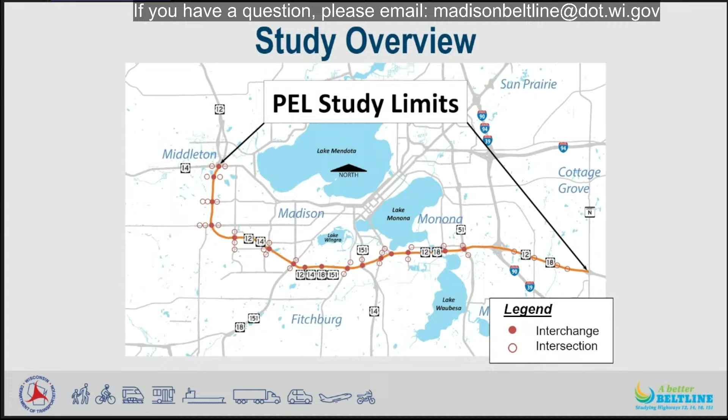The study limits begin at US 14 or University Avenue in the city of Middleton and extend about 20 miles south and east to the County N interchange in the town of Cottage Grove. The Beltline PEL study corridor carries up to 143,000 vehicles per day and includes 18 interchanges. The PEL study process sets up collaboration between federal, state, and environmental agencies, as well as project stakeholders. This early coordination helps eliminate unreasonable alternatives, accelerates environmental review, and may identify any concerns.

The PEL study results can flow directly into future National Environmental Policy Act, or NEPA, studies. A NEPA study analyzes the environmental impacts of projects that use federal funding. During the NEPA process, the potential long-term improvements identified in the PEL will be evaluated in more detail. Design and construction of a project cannot occur until the NEPA process is complete. A PEL study initiated prior to NEPA analysis can help to streamline overall project delivery.

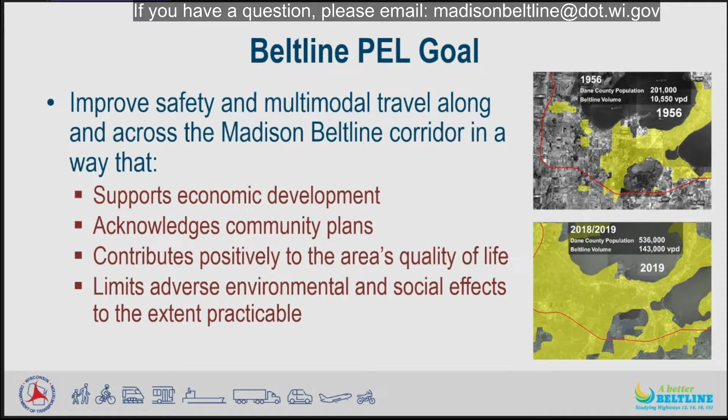The goal of the Beltline PEL study was developed early in the process through collaboration with agencies, municipalities, and other stakeholders. The Beltline PEL seeks to improve safety and multimodal travel along and across the Beltline corridor in a way that supports economic development, acknowledges community plans, contributes positively to the area's quality of life, and limits adverse environmental and social effects. With input from the agencies, local municipalities, and stakeholders, 12 Beltline PEL objectives were also developed. These objectives focus on improving safety, mobility, and accessibility for all modes of travel on, across, or near the Beltline.

The first steps of the study involved outreach and engagement. Using the feedback received, numerous improvement concepts or components were developed throughout the corridor for multiple transportation modes, including vehicles, pedestrians, bicycles, and transit. The components were then prioritized and combined into a range of potential long-term solutions called strategy packages. With input from various agencies and stakeholders, a draft preferred strategy package was identified. In addition, options for how the corridor could be separated into different sections for future NEPA studies were developed, along with general timeframes for when those studies should begin.

The Wisconsin DOT identified a preferred strategy package containing the improvement components the agency proposes to carry forward for more detailed analysis in future NEPA studies. The work completed during the Beltline PEL study is documented in the draft Beltline PEL summary report. The next few slides provide more detail on the strategy package development process.

The section of the Beltline east of the interstate was not included in the development of the strategy packages. Several corridor needs for this section were addressed as part of the US 12/18 and County AB interchange project, and a US 12 freeway conversion study identified potential spot improvements that could be made farther east if needed.

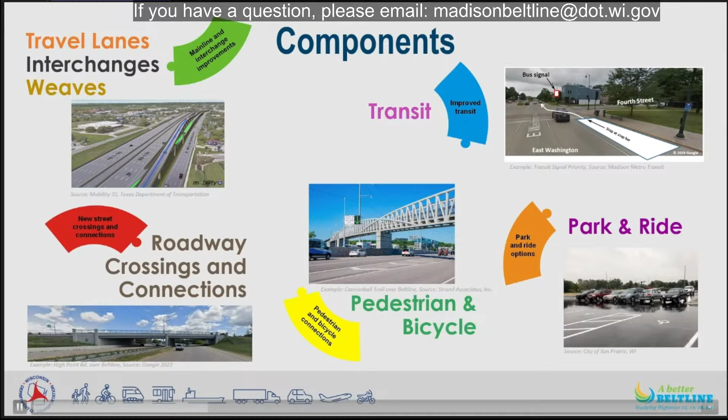The components were then prioritized to determine which combination would fit into the multiple strategy packages, representing a range of long-term options for the Beltline corridor. The mainline and interchange components were prioritized differently than the other component categories. The number of travel lanes added to the Beltline mainline varied with the specific strategy package. A higher mobility strategy package added travel lanes to the Beltline, while lower mobility packages did not.

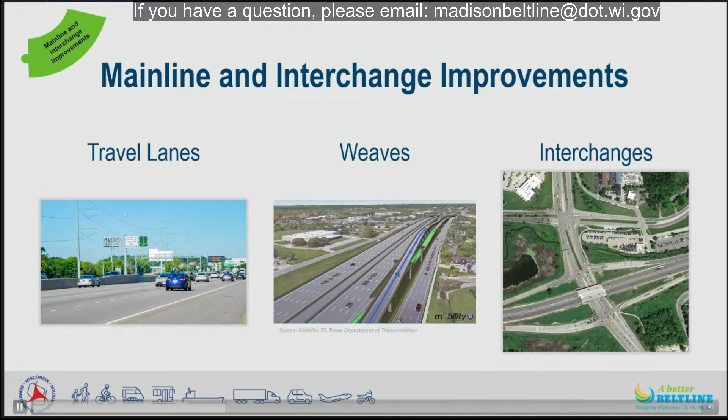For the weaving and interchange improvements, the locations with the worst traffic operations were typically included in more of the strategy packages, and the locations that were not as bad were included in fewer. The remaining components of roadway crossing and connections, bicycle and pedestrian connections, park and ride, and transit categories were prioritized based on meeting the Beltline PEL study objectives, feedback received during outreach efforts, potential environmental and real estate impacts, and accessibility improvements to nearby jobs or destinations.

WisDOT received feedback on the transit components before the Madison Metro Network redesign took effect in June 2023. Transit components were then reprioritized based on those changes. Several strategy packages were developed that combined individual components to meet the Beltline PEL study objectives throughout the corridor.

They included different levels of improvement that range from a strategy package that keeps the Beltline as it is today with only essential improvements and maintenance, labeled SP1 or the Preserve and Maintain package, to a strategy package that allows the Beltline to operate as well as possible while offering the highest level of mobility and accessibility to all modes of travel, labeled SP4. After gathering feedback on the strategy packages and completing additional outreach and analysis, a draft preferred strategy package was identified for the corridor and presented at the last public meetings in 2024.

2 main factors guided the identification of the draft preferred strategy package. The first was the stakeholder feedback received during previous outreach efforts, including several main themes. Respondents want a focus on multimodal components. Adding additional mainline or general purpose lanes to the Beltline was generally not favored throughout the corridor, particularly east of Verona Road where the flex lane is. However, an extension of the flex lane west of Verona Road was generally viewed as acceptable. And in general, people agreed with how the components were prioritized and placed into the strategy packages.

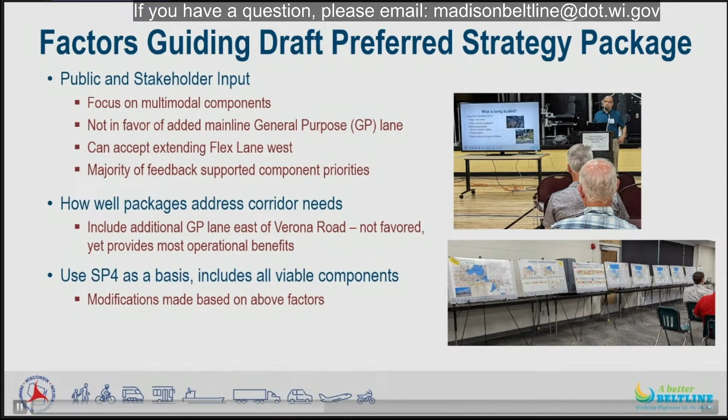Since the last public involvement meetings, modifications were made to the draft preferred strategy package, and the preferred strategy package has been identified. The preferred strategy package is not what's proposed for future construction. It includes the improvement components that the Wisconsin DOT feels should be carried forward and used to develop the range of alternatives that will be evaluated in more detail during future NEPA studies. Some components may change or be eliminated from future consideration as the alternatives, impacts, and costs are developed in more detail and additional feedback is received.

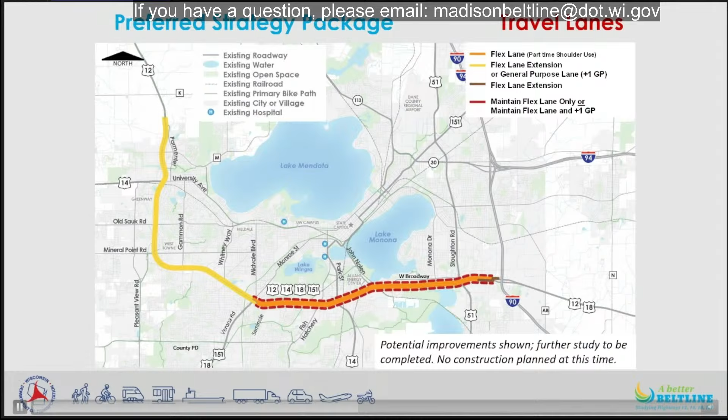Let's review the preferred strategy package. For the mainline components, the section of the Beltline west of Verona Road, shown by the yellow line, includes 2 possible options, either extending the existing flex lane or adding 1 general purpose lane in each direction. The mainline components are shown extending north of the northern study limit to Parmenter Street.

This is because the close interchange spacing, horizontal curves, and the vertical profile of the Beltline in that area make it difficult to drop an additional lane until the Parmenter Street interchange. The section of the Beltline between Verona Road and the interstate also includes two possible options: either keeping the same number of mainline lanes and the existing flex lane, or potentially adding one general purpose lane in each direction while still keeping the existing flex lane, shown by the dashed red lines.

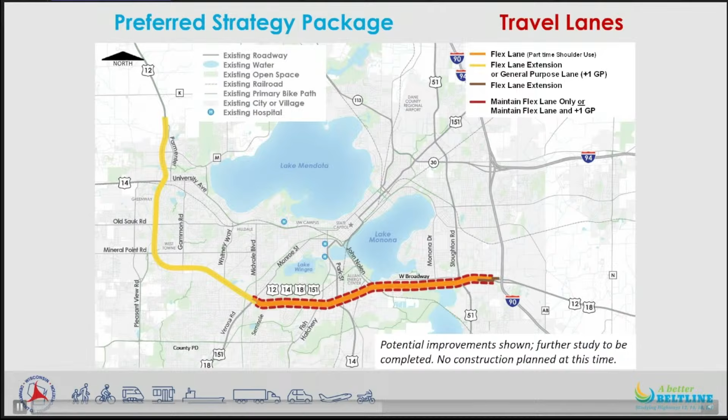For the section of the Beltline between Stoughton Road and the interstate, the existing flex lane would be extended to the interstate, shown by the brown lines. The preferred strategy package includes weaving improvements at several locations shown by yellow circles on the map. Weaving areas are in places where traffic entering the Beltline mixes with traffic exiting at the next off-ramp. These areas often have safety concerns and are where freeway operations frequently break down.

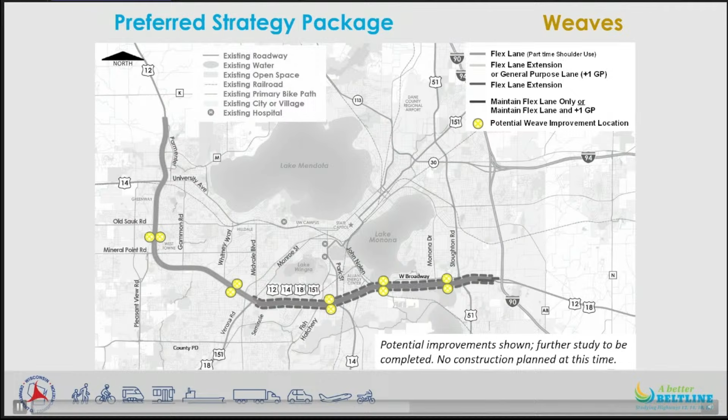Locations include both mainline directions between Old Sauk Road and Mineral Point Road, between Whitney Way and Verona Road, between Fish Hatchery Road and Park Street, between John Nolen Drive and West Broadway, and between Monona Drive and Stoughton Road. There are no changes to the number or location of the weaves included in the Preferred Strategy Package versus the draft Preferred Strategy Package. The Preferred Strategy Package proposes improvements at each interchange.

Most locations are anticipated to be conventional improvements, such as adding turn lanes or through lanes at the ramp intersections. These are the darker blue circles on the map. Locations where more substantial changes are being considered are the light blue circles. These locations include Gammon Road, Whitney Way, Verona Road, Stoughton Road, and the Beltline interchange with I-39/90. The Stoughton Road interchange is currently being evaluated as part of a separate Wisconsin DOT study.

Two modifications have been made to the interchange components identified in the draft Preferred Strategy Package. The locations of these interchanges are highlighted by yellow boxes. The first is the addition of proposed improvements at the I-39/90 interchange at the Beltline. After further analysis, it was determined that a third ramp lane should be evaluated going from the eastbound Beltline to northbound I-39, as well as from southbound I-39 to the westbound Beltline.

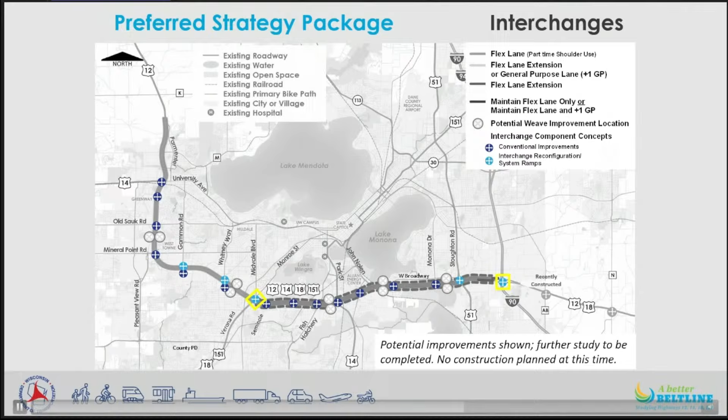The second is the removal of the conventional interchange improvements at the US 18/151 Verona Road interchange. Further analysis determined that the relatively minor improvements included in the conventional option would not address the operational issues at the interchange. Therefore, this improvement component was eliminated, leaving only the interchange reconfiguration system ramps option.

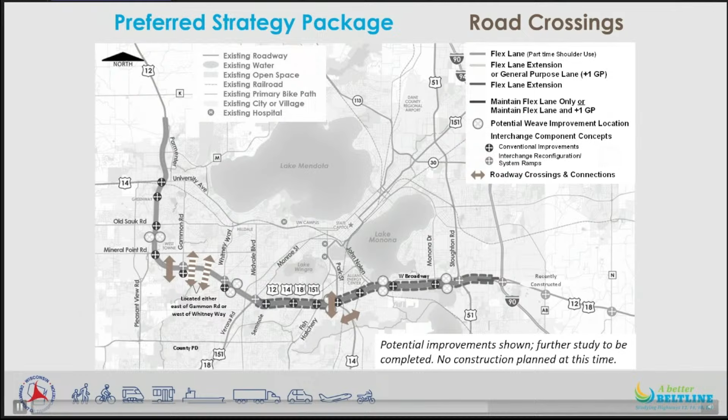Potential new roadway crossings included in the Preferred Strategy Package would accommodate vehicles, bicycles, and pedestrians. Locations are shown by the brown arrows on the map. West of Gammon Road, a crossing either east of Gammon Road or west of Whitney Way, the dashed arrows, west of Park Street, and a crossing of US 14 south of the Beltline. There were no changes to the number or location of roadway crossings and connections components. However, the City of Madison is currently conducting a study of the new crossing location west of Park Street at Perry Street.

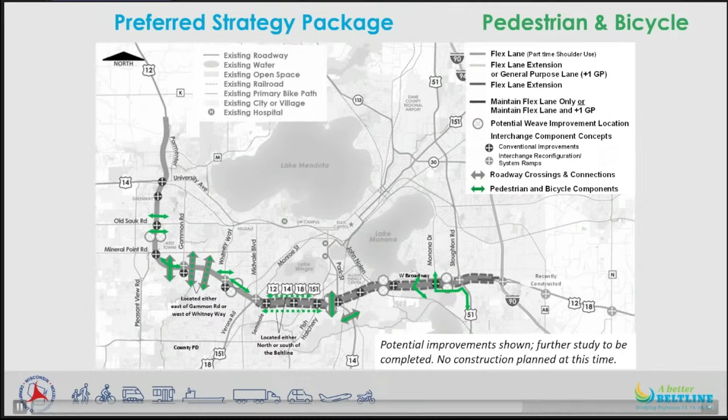Pedestrian and bicycle accommodations proposed for more detailed evaluation are shown in green. In addition to the accommodations provided on the roadway crossings just described, additional locations include north of Old Sauk Road, south of Old Sauk Road, an extension of the West Towne Path from Mineral Point to Gammon Road, which is currently partially constructed, a crossing of Whitney Way north of the Beltline, a connection from Whitney Way to the Southwest Commuter Path, a connection from Seminole Highway to the Cannonball Path, either north or south of the Beltline, shown by the dashed green arrows, a connection from West Broadway to the Upper Yahara River Trail through the Capital Springs Recreation Area, and a connection from Monona Drive to Stoughton Road and south to McFarland. No changes have been made to the number or location of pedestrian and bicycle components.

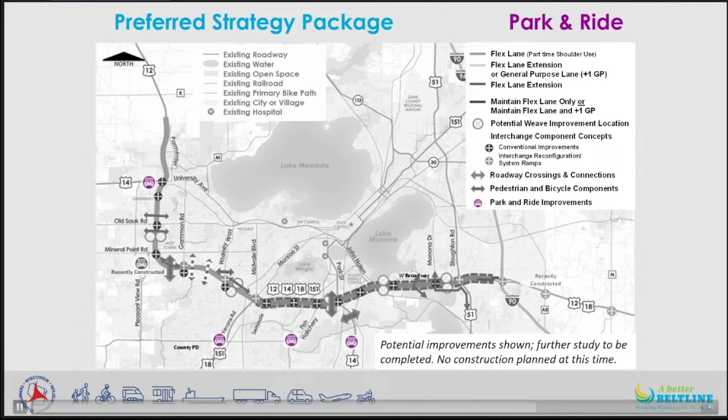Possible park and ride locations included in the Preferred Strategy Package are shown by purple circles. They include US 14 University Avenue at the Beltline, US 151 Verona Road at County PD, Fish Hatchery Road at County PD, and US 14 at McCoy Road. No changes have been made to the number or location of park and rides.

Finally, transit priority improvements are proposed at each of the interchanges with Metro Transit routes. There are 9 total, outlined by a purple hexagon. The highest priority locations are where bus rapid transit service is currently or is planned to travel through the interchange. These are located at Mineral Point and Fish Hatchery Roads. One option for transit priority would allow buses to pass cars lined up at traffic signals at or near the Beltline to improve on-time service.

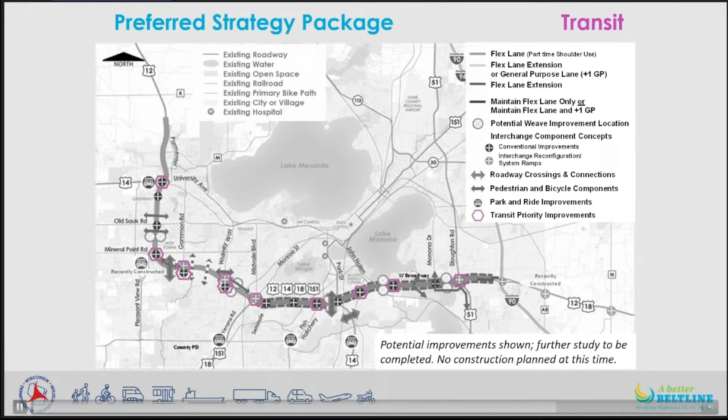No changes have been made to the locations proposed for transit priority. This map shows all components included in the preferred strategy package. These are the potential improvements the Wisconsin DOT feels warrant further investigation during future NEPA studies. It is not a preferred construction alternative. The preferred strategy package may be adjusted during future NEPA studies as the alternatives, impacts, and costs are reviewed in more detail and additional feedback is received.

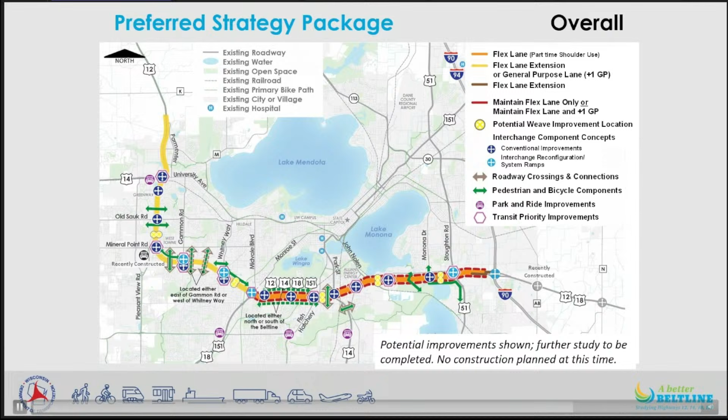The study team investigated how the corridor could be logically separated into different sections for future NEPA analysis and eventual construction to most efficiently address the Beltline needs when they're anticipated to occur. Factors that influence the timing of the future NEPA studies include the safety, traffic operations, and infrastructure needs in each section. The Beltline needs may change over time, so the proposed sections and timing may need to be adjusted accordingly if new issues or needs arise. No construction related to the Beltline PEL study is scheduled at this time.

The Verona Road interchange is currently seeing long backups during peak periods due to rapid growth in the metropolitan area. In the near term, the Wisconsin DOT is evaluating potential interim or spot improvements that could be implemented to help address the existing congestion issues and improve safety. More information on the possible near-term improvements can be found in the PEL summary report.

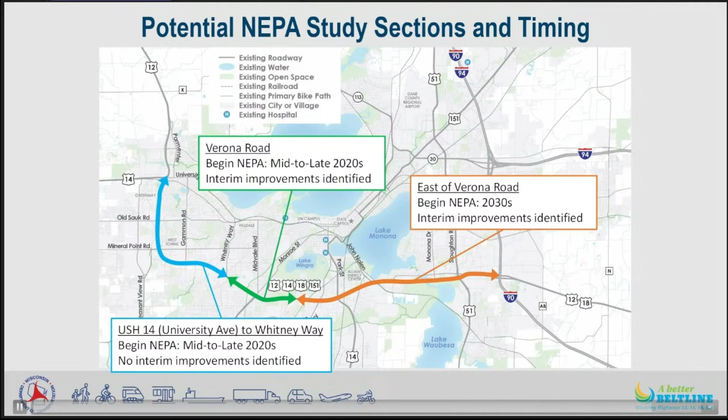In addition, the department is investigating potential interim or spot improvements that may be needed in this section before completing a corridor-wide NEPA analysis. More information on the potential spot or interim improvements can be found in the draft Beltline PEL summary report. Let's look at the next steps for the Beltline PEL study.

The work completed and the conclusions reached during the study are documented in the draft Beltline PEL summary report. The feedback received from this public involvement meeting will help determine what changes, if any, should be made to the preferred strategy package and the draft Beltline PEL summary report. Any updates will be made in the next few months. The final results of the Beltline PEL study will be documented in the final PEL summary report, which is anticipated to be completed and published on the study website in early 2026. This would complete the Beltline PEL study. Opportunities to provide feedback on the potential long-term improvements for the Beltline corridor will continue during future NEPA studies.